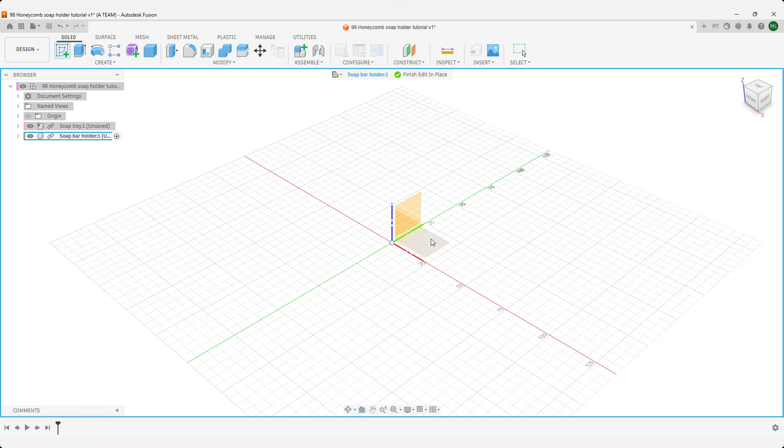The Edit in Place dialog appears because the components were created as external components. That setup makes them reusable across designs through insertion and linking. For this workflow, internal components are usually the better choice. They simplify navigation, reduce context switching, and avoid the extra prompts tied to external references.

You don't need to match this setup exactly. Create the components as internal if you want a smoother experience while following along. A 100 by 60 mm footprint works well for a smaller bar of soap. If needed, you can always scale the STL proportionally in your slicer.

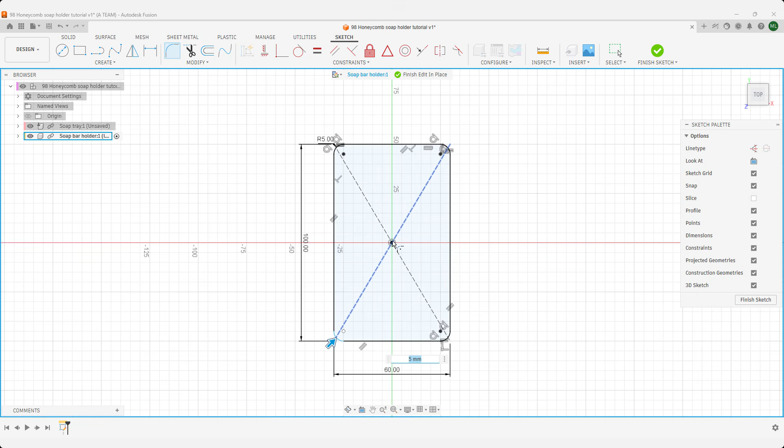You can extrude the profile as a solid and apply fillets afterward in the solid environment. That keeps the sketch clean. The trade-off is control. When you add fillets in the sketch, both the inner and outer corners are resolved automatically during the extrude, which can save time and keep the geometry consistent.

Hit E for extrude without closing the sketch and set the height to 20 mm. That gives a solid balance between material use, print time, and overall proportions. You'll need two simple sketches for the outer pattern you saw earlier. Keep it fast here, just set up the sketches and move on.

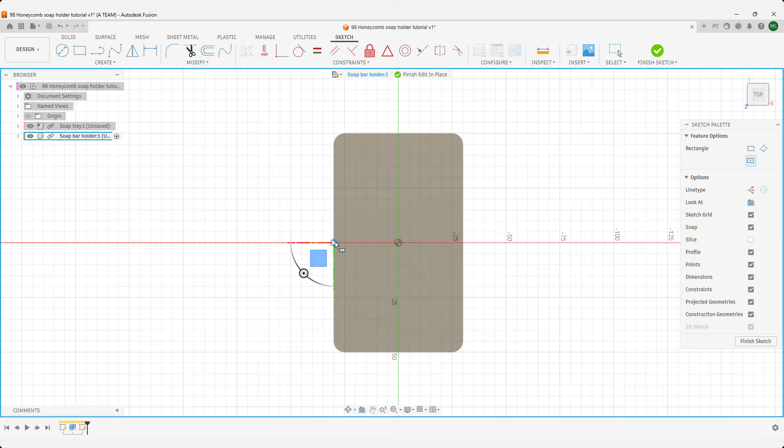If you want more control later, define user parameters. It's optional, but it makes scaling, spacing, and iterations far easier once you start refining the design. I set this up twice instead of once because I'll use mirror later. Since the sides have different lengths, this approach is quicker and avoids extra adjustments after mirroring.

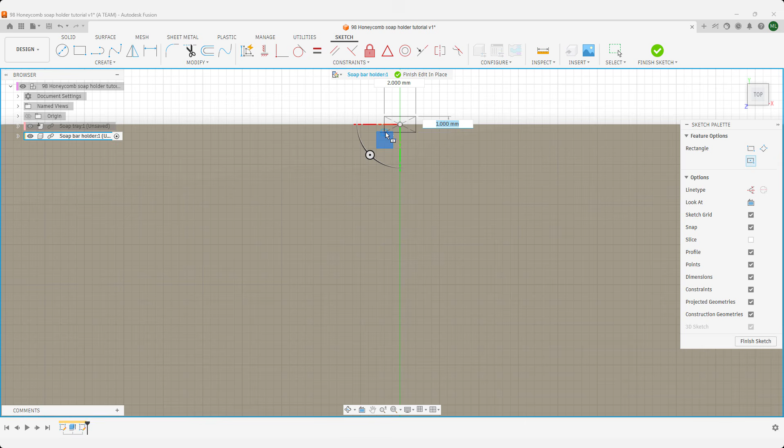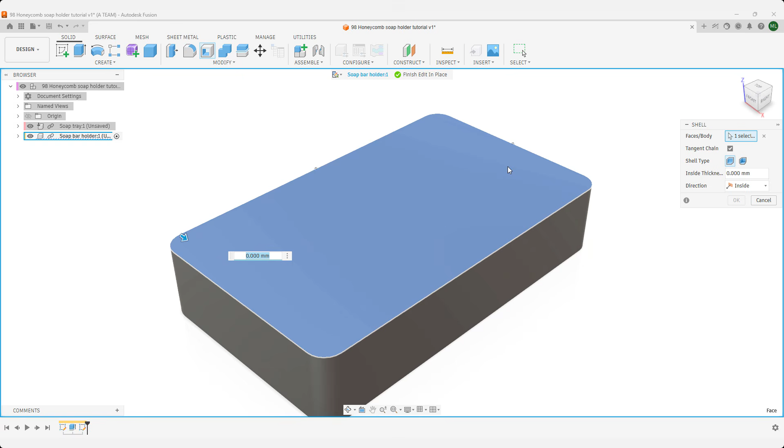Before adding the rectangular pattern, shell and chamfer the base. That way, the shell command ignores the pattern features. Otherwise, the internal walls become uneven and harder to control. Shell to 3 mm for a solid balance between strength, print time, and material use. This also gives you enough margin for the pattern, since the walls will thin slightly where the pattern is applied.

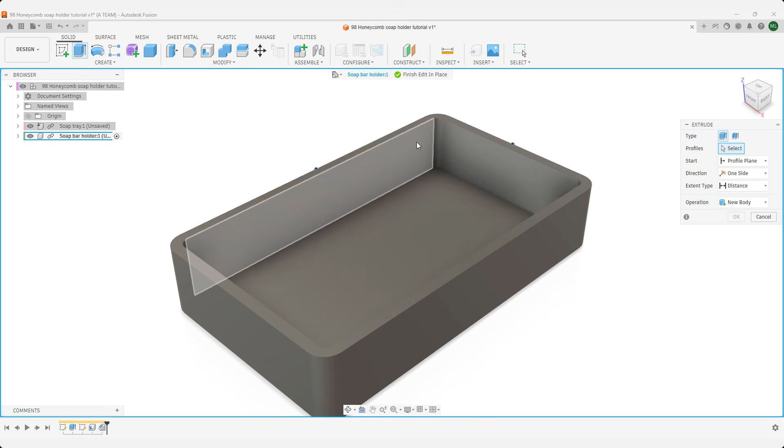Chamfer the bottom edges to improve bed adhesion and reduce sharp transitions. It prints cleaner and gives the final part a more refined look. Extrude the long side and the short side as separate features. This keeps the timeline clean and gives you flexibility when applying the pattern.

I'll show two different pattern methods so you can see both approaches, but in practice you only need to use one. Pick the one that fits your workflow. Set the extent type to all so the cut passes through the entire body. Then take a quick look with the view cube to confirm direction and coverage before moving on.

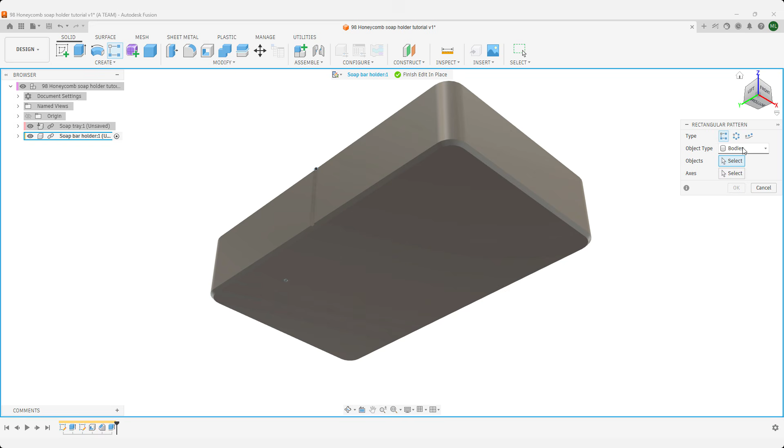Set the rectangular pattern to features, pick a horizontal axis and switch the direction to symmetric so the pattern distributes evenly on both sides of the seed feature. Use extent for the distribution. That means you control the total span and the quantity, not the spacing directly.

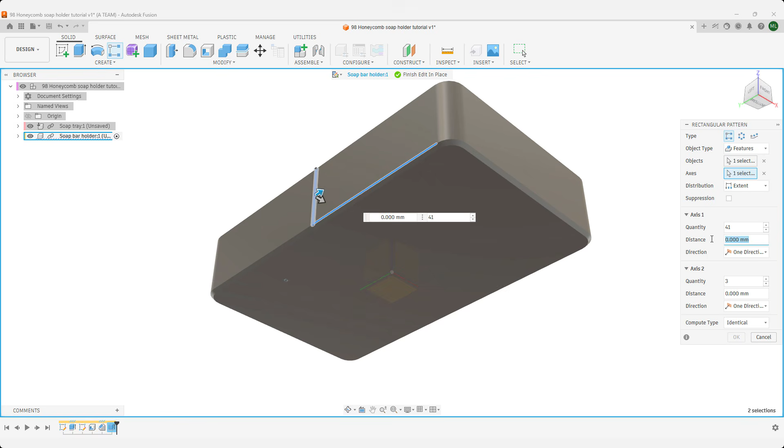The side is 100 mm long. With 5 mm fillets on each end, you're left with 90 mm of usable length. That gives you a clean, centered distribution across the face. Set the quantity to an odd number. That keeps the pattern centered while still giving you an even count of features on each side of the original.

Use mirror to place the same pattern on the opposite side. Select the pattern features from the timeline, since that is usually the easiest and cleanest way to pick the correct features. For the mirror plane, use the original vertical construction plane. The design was centered on that plane from the start, so the mirrored pattern lands exactly where it should.

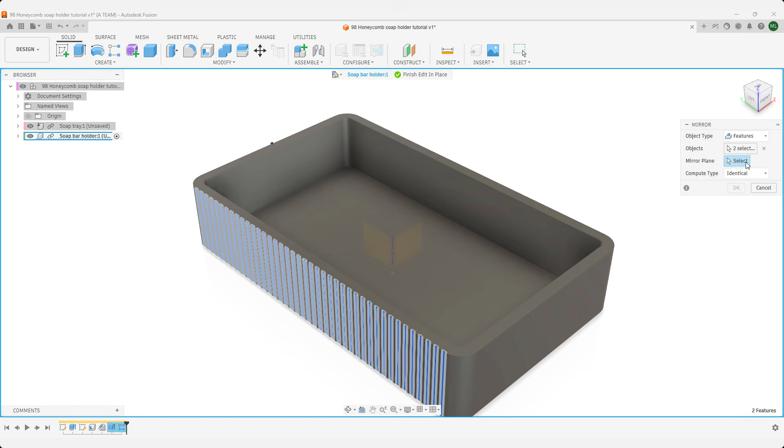You now have the pattern on both sides. If you edit the original pattern or the cut features earlier in the timeline, the mirrored result will update with those changes. Make another extrusion on the short side. Set the extent to all, so future height changes to the soap holder are included automatically.

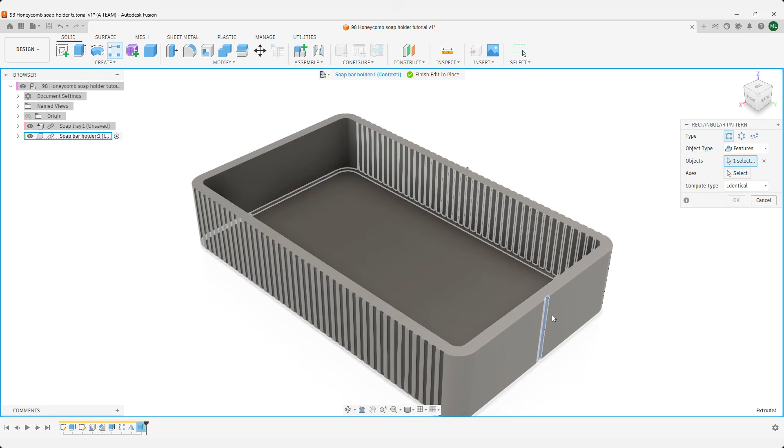Use the view cube to orient yourself, then start a rectangular pattern. This time, use the distribution setting. Set the spacing to 2.25 millimeters and the quantity to 23. Since each cut is 1 millimeter wide, this gives you 1.25 millimeters of space between each feature.

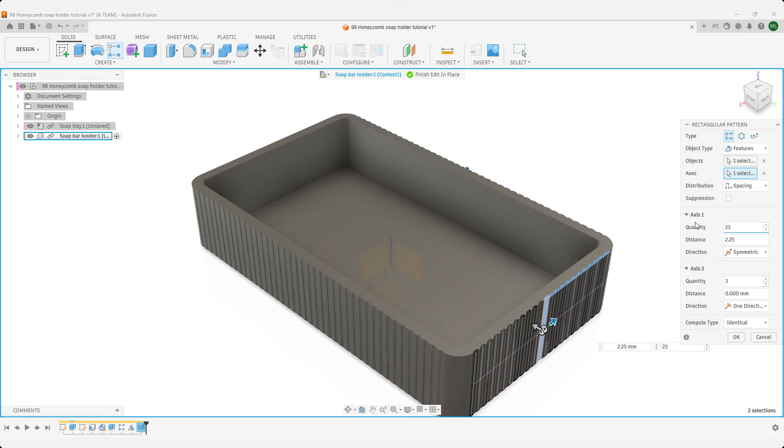The full pattern width becomes 50.5 millimeters from outside to outside: 23 1 millimeter cuts plus 22 spaces at 1.25 millimeters. Because the original footprint is 60 millimeters and the 5 millimeter fillets reduce the usable straight section to about 50 millimeters, this gives the short side a clean balanced layout similar to the long side. Use the construction plane in the middle to mirror the feature, just like you did on the long side.

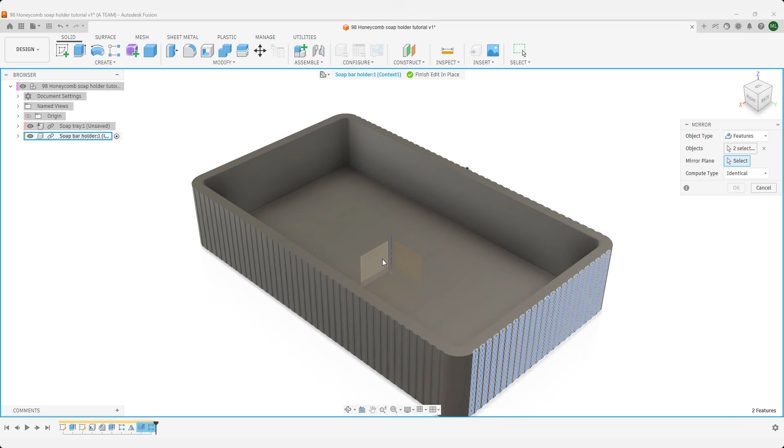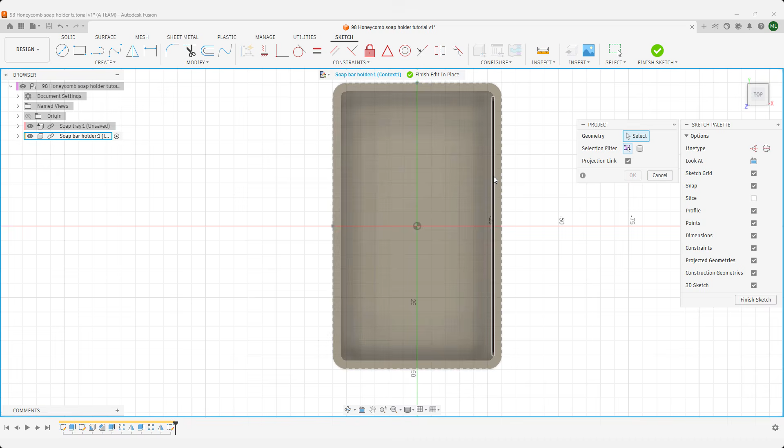Well done. Let's continue and create the shelf that the soap tray will rest on. Create a new sketch on top of the soap holder. Project the top geometry into the sketch and leave projection link active, so future changes update automatically. Offset the projected geometry by 1 millimeter. Then use Extrude cut on the new profile and cut it down 5 millimeters.

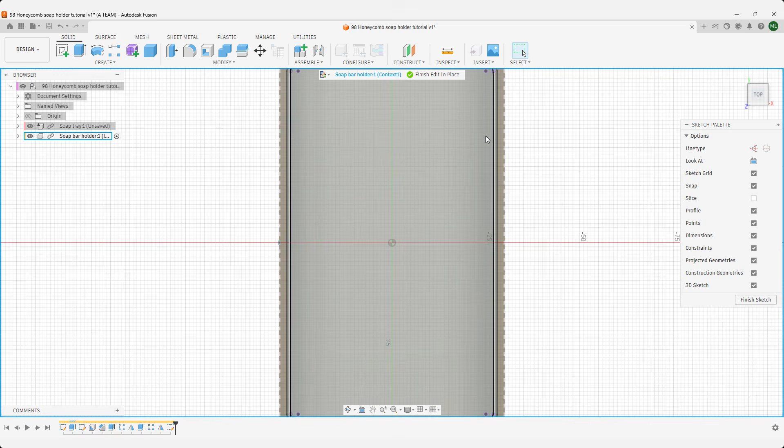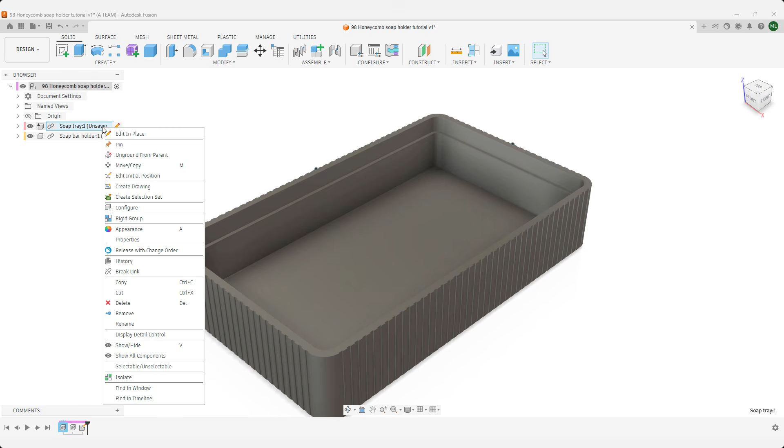Great job keeping up. Finish editing this external component, then use Edit in Place to jump into the soap tray component. If you're working with internal components or bodies, just activate the correct component or body. We'll build the soap tray from the shelf you just created. Start a new sketch on the shelf surface. Project the profile, then offset the footprint 0.5 millimeters to create clearance between the tray and the base.

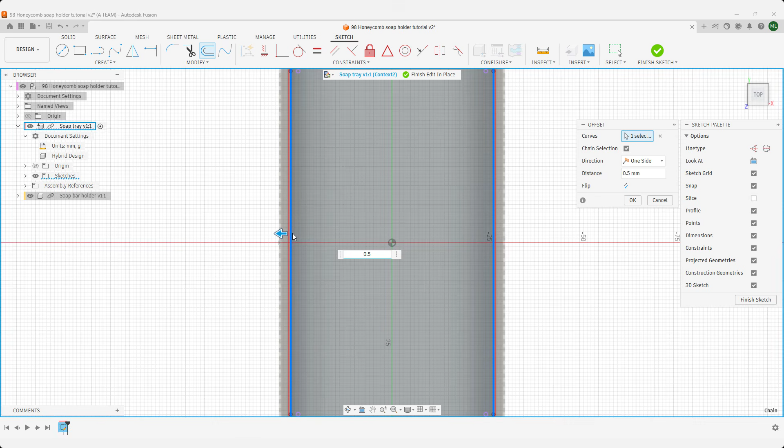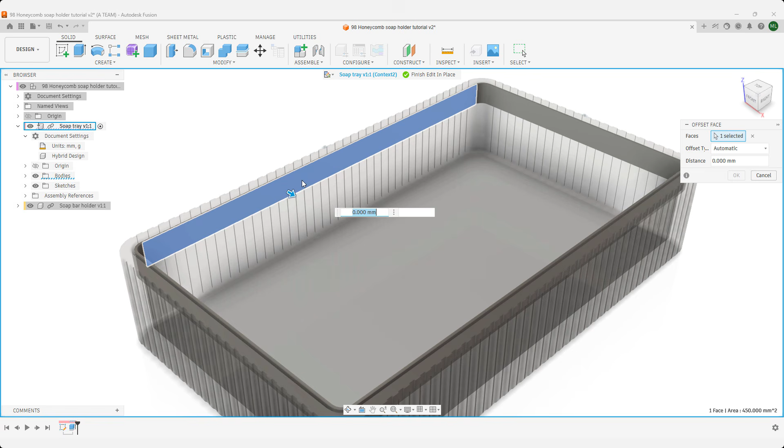There are several valid workflows from here, but here's one clean approach. Create a thin profile from your sketch, then use Press Pull to control the thickness. This keeps the feature simple and easy to adjust later in the timeline. Take a quick look at the offset face settings in the pop-up menu if you have trouble selecting all faces.

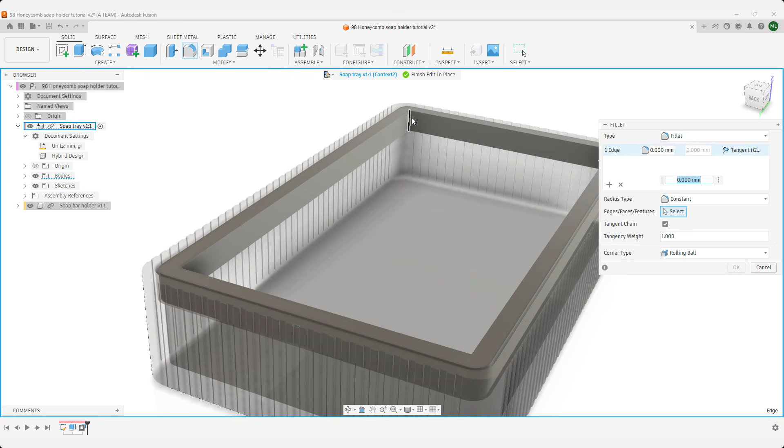Set the thickness to 2.5 millimeters. Together with the earlier 0.5 millimeter offset, that gives you a total of 3 millimeters, which prints reliably with standard nozzle sizes. Finish by adding a 2.5 millimeter fillet on the inner corners. This improves the look and gives the tray a more stable, durable structure.

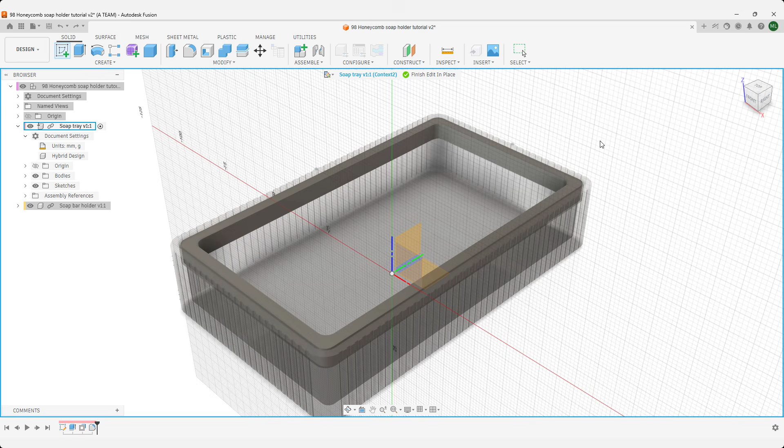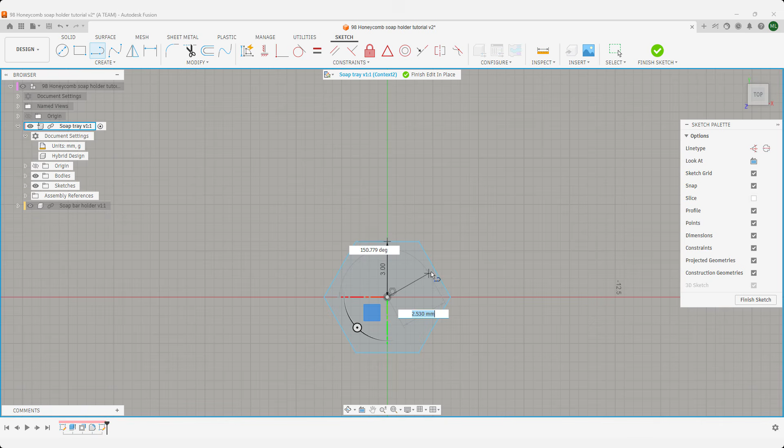Continue with the sketch on top of the tray. Place a circumscribed polygon at the center origin and give it a radius of 3 millimeters. Use the keyboard shortcut L to create an additional line for the pattern. Press X to turn that line into a construction line. This makes it a helper line, not part of the final design.

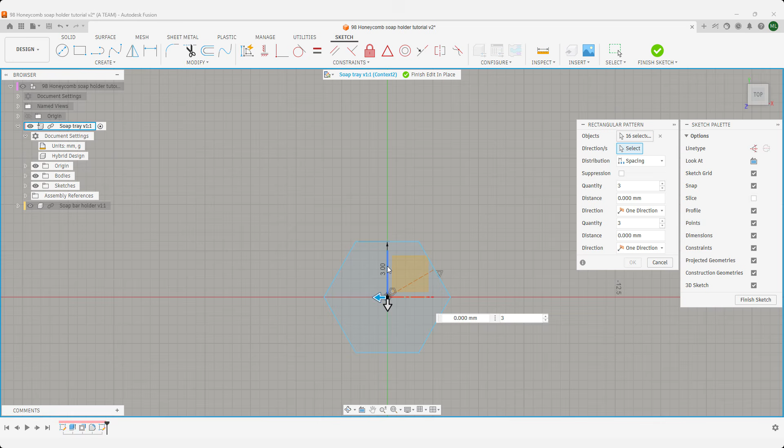Rectangular patterns have pros and cons inside the sketch environment, but we'll use one here. Select the circumscribed polygon as the object, then use the origin axis and the construction line as your direction lines. Use the spacing setting for the pattern distribution here. It's easier to control and predict.

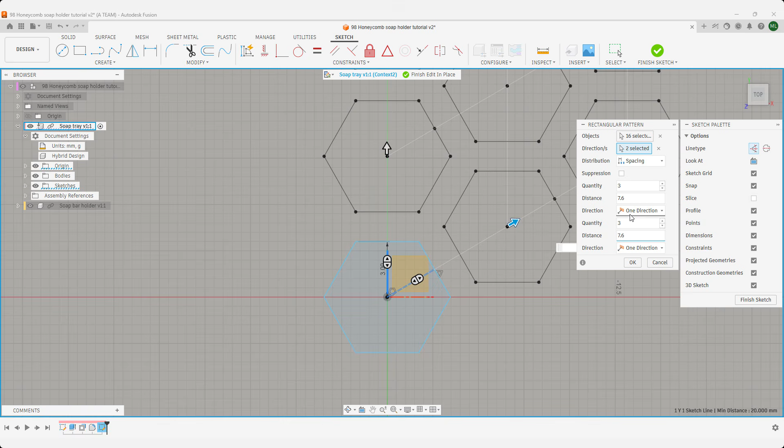Each polygon has a radius of 3 millimeters, which gives a diameter of 6 millimeters. Set the spacing to 7.6 millimeters. That leaves 1.6 millimeters between each polygon. This gap prints reliably with the standard nozzle and gives enough structural strength. Set the direction to symmetric for both directions so the pattern grows evenly from the center.

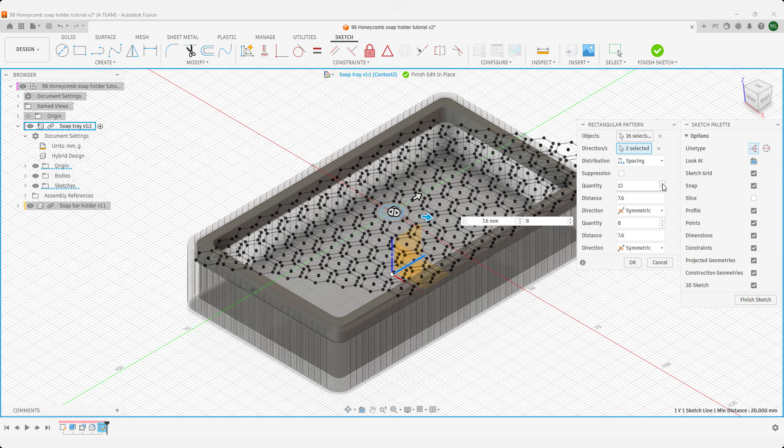Increase the quantity until the pattern clearly extends beyond the frame. Oversketching is fine here since you won't use every polygon in the final geometry. Confirm the honeycomb pattern sketch and continue within the same sketch. Project the outer boundary of the tray and keep it as a linked projection. This gives you a clean, parametric boundary that will control the honeycomb pattern.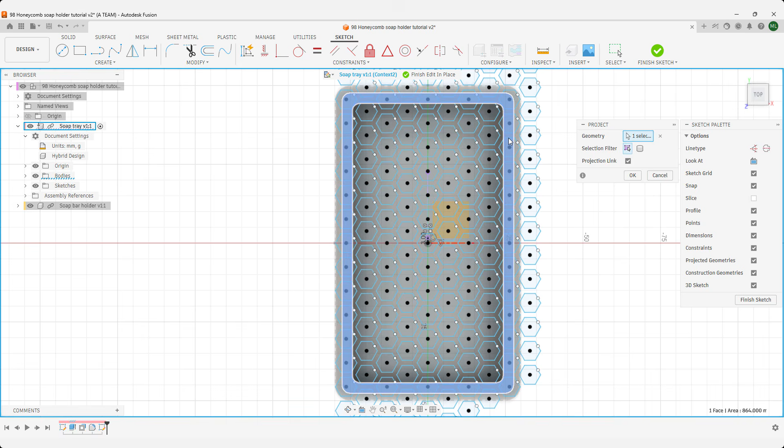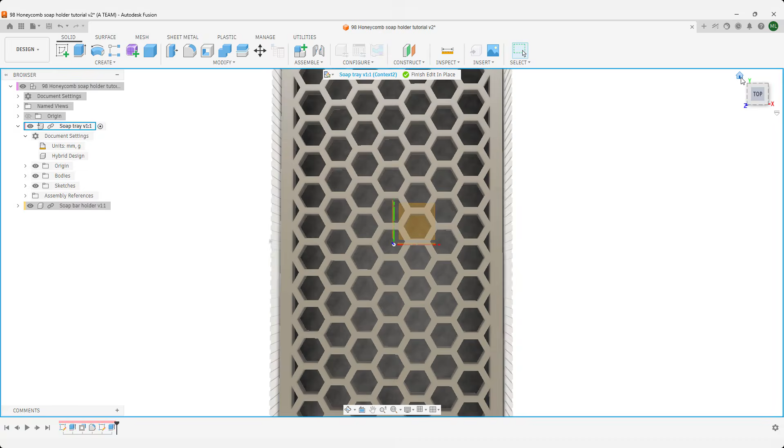Finish the sketch and press E to go straight into Extrude. Select the honeycomb profiles inside the boundary and extrude them the same distance as the soap tray frame. Set the operation to join if you want a single solid body. If you plan to work with multicolor 3D printing or export flexible 3MF setups, set it to new body instead. This keeps the honeycomb pattern separate and easier to control later in your slicer.

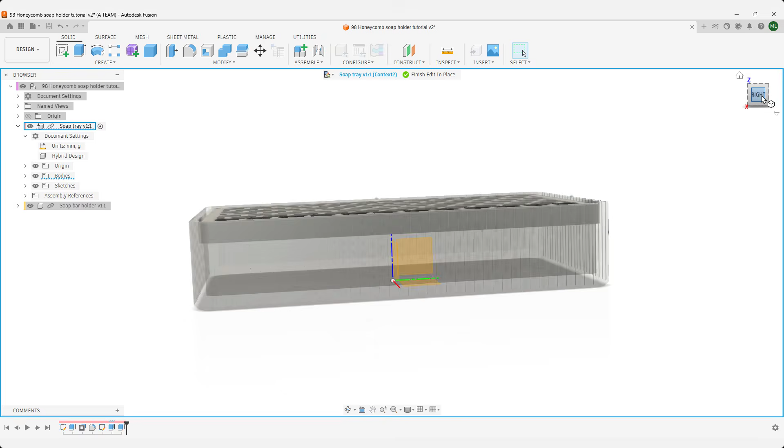A good alternative to keeping the tray and the holder at the same level is to lower the tray slightly below the holder. You could do this with a new extrude, but it's cleaner to edit the original extrusion directly in the timeline. That keeps your feature tree simple and easier to manage. For a more robust setup, control the height with user parameters. That gives you full flexibility to adjust the offset later without rebuilding features, which is a strong parametric approach.

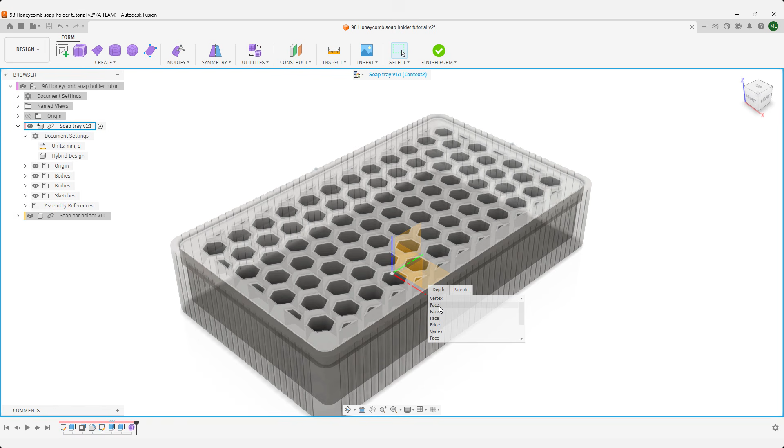We're now inside the form environment with the task of creating curvature in the soap holder. Press and hold the left mouse button to bring up the selection menu, then pick the correct face. Place a box at the center of the origin and set the dimensions to 40 by 80 millimeters. This gives you a clean base that works well as a soap reference shape.

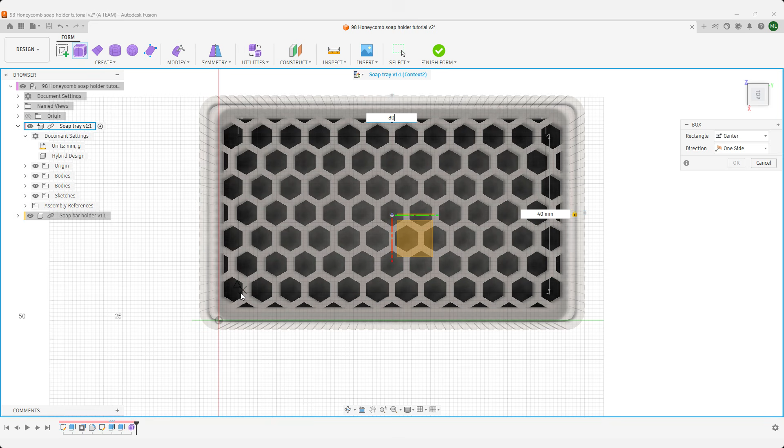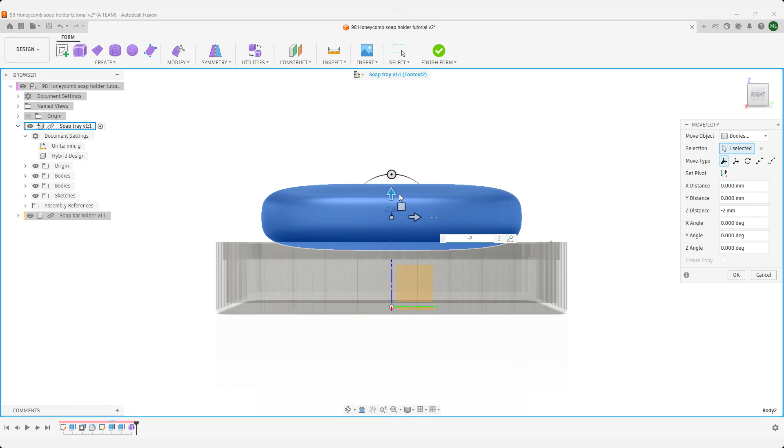Inspect your model from different angles, then use the view cube to position yourself from the side. Press M to move the form model downward. I'll use 2 millimeters, but you can adjust the distance to fit your design. When you're done, finish the form edit and activate Combine in the solid modeling environment.

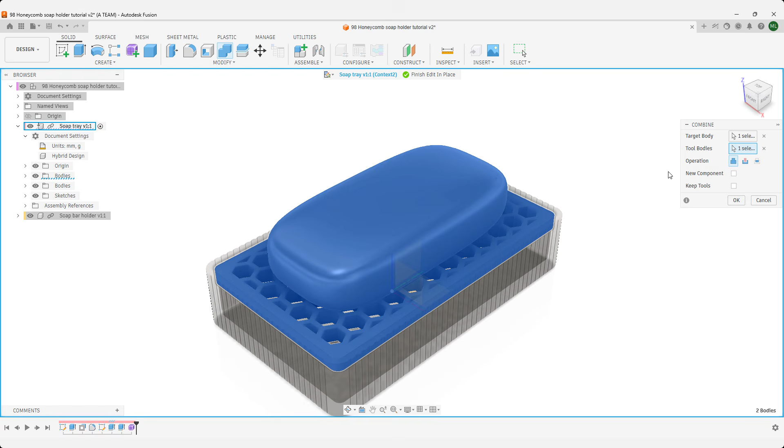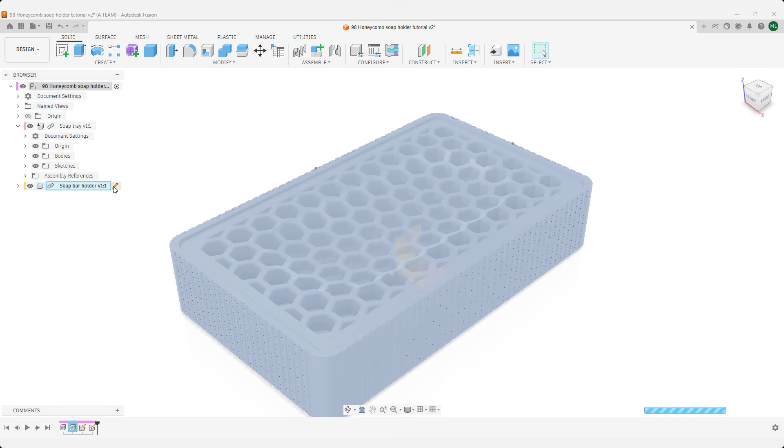Change the angle with the view cube, then select your soap tray as the target body and your soap as the tool body. Set the operation type to cut so the tool body cuts into the target body. Preview the result from different angles before you confirm the action. You now have one side with the cutout and another flat side. If you prefer a flat surface when the soap is new, just flip the printed tray upside down. Later, when the soap becomes smaller, you can use the cutout side for better support and grip.

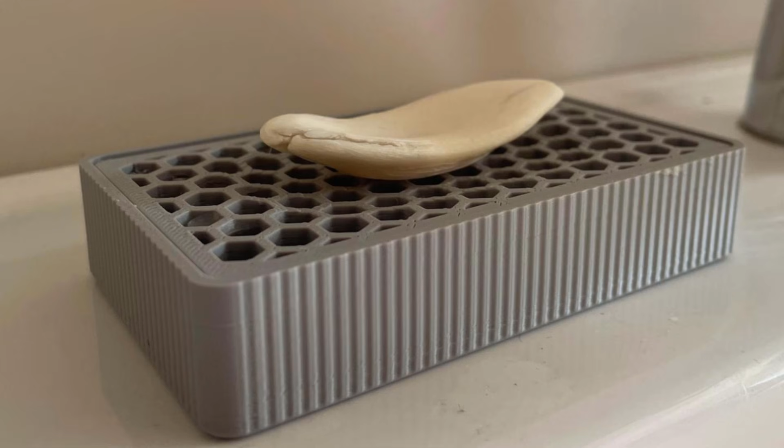As the final edit, I decided to pull the inside face of the soap tray component 0.5 millimeters to make the shelf slightly larger and provide more margin for the soap tray. The print came out great, and this fast project resulted in a clean-looking and functional 3D print. I hope you enjoyed this quick approach to the design idea. This is a solid first iteration, and if you want to push the workflow further, you can add user parameters for an even smoother and more optimized setup.